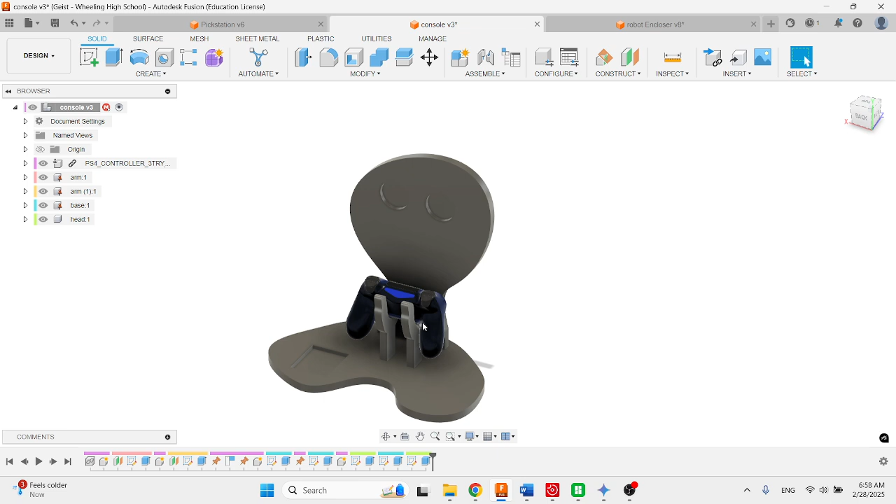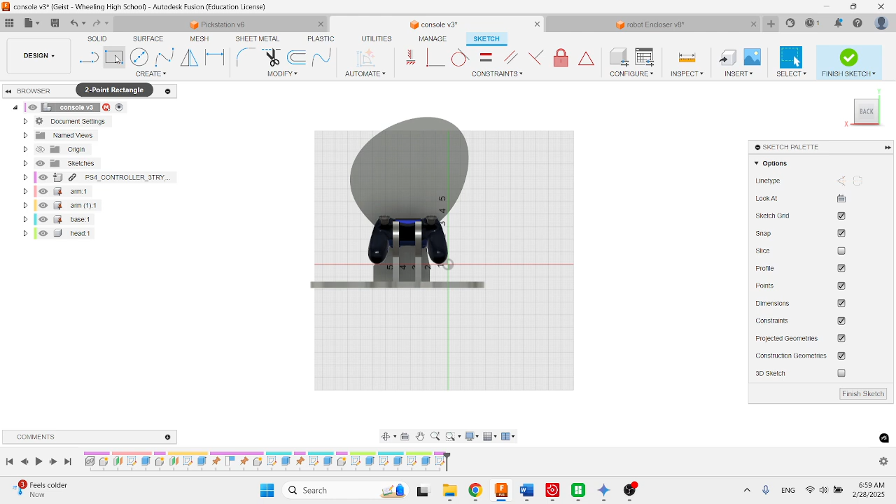Before we start laying this out for manufacture, you're going to want a sketch equal to the size of the material I'm giving you on the ShopBot. Make a sketch at the assembly level, pick any plane - I'm going to pick the front plane - and make a rectangle that is 24 wide by 32 tall. Go ahead and finish that sketch.

This is going to become the plane that we put all of our pieces onto, and it's going to automatically arrange those for us.

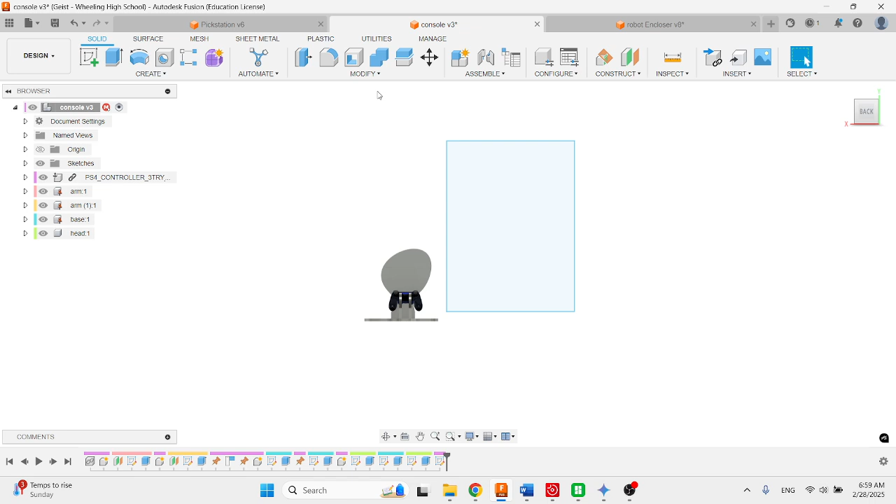Go up to Modify and click on Arrange. On the left-hand side, where it says components, only select the components that you are going to manufacture - think about it, only the stuff that the ShopBot's going to cut. So that would not include the PS4 controller for me, or anything else you might have created as objects that might be stored.

For me, I'm going to cut an arm, a second arm, the base, and the head. You'll notice they start to populate inside my components window. Once you have all of them selected - I have 4 parts that I'm going to cut.

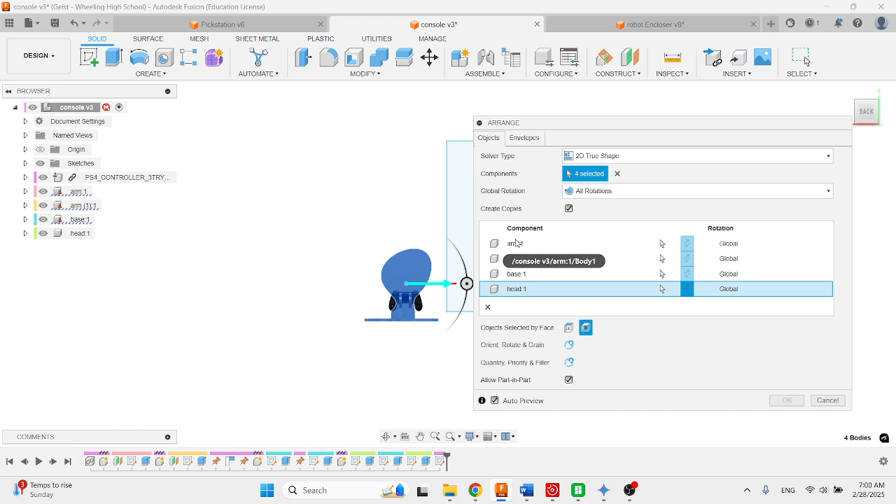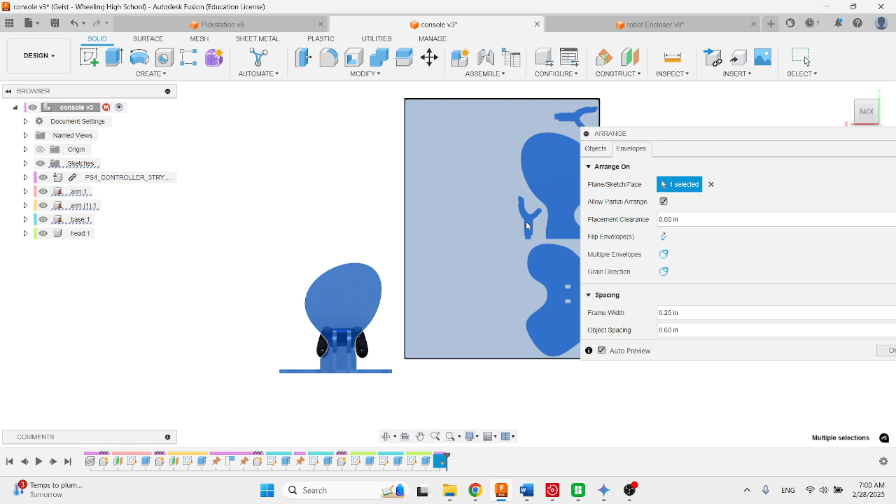Then go to the Envelopes tab, and move this window over a little bit. Click on the sketch you created that represents the 32 by 24 ShopBot sheet. Wait just a moment, and you'll see each of the pieces has been laid out onto that sheet. I'm going to tilt it a little bit.

Down here where it says spacing, it shows frame width and object spacing. Since we're using a 1/4 inch tool, think about how much space we need in between as the tool cuts. We're going to leave that at 0.6, because as it's contouring around these, we need to allow enough space for the webbing so our material doesn't come up. Leave the frame width at 1/4 inch - that's the gap between the parts and the edge of the material. The object spacing is how much space it allows between the parts.

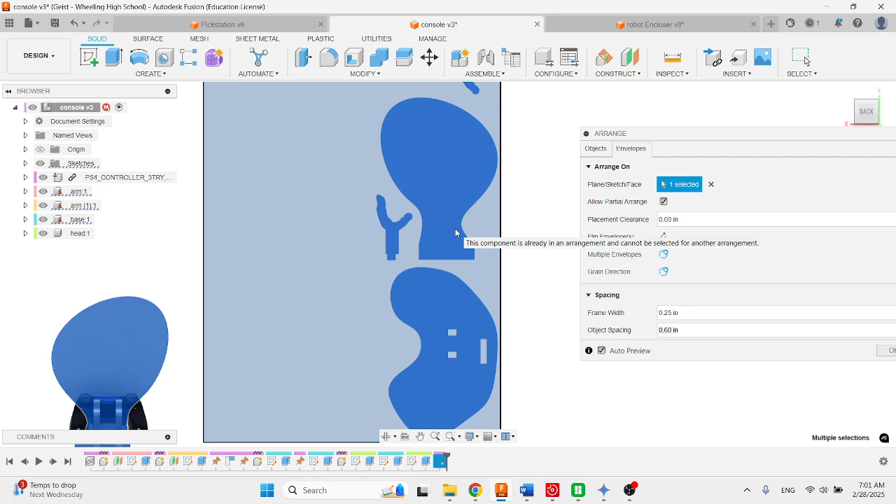If not all of your pieces show up, call me over - that might mean you designed too much stuff and it doesn't fit in the 24 by 32 space, or there might be another issue I can help you with. Okay, so I'm going to click OK. Give it a moment.

If you have any pockets, make sure the pockets are facing the same direction, which in my case they do. So I'm going to click Save just in case my program crashes.

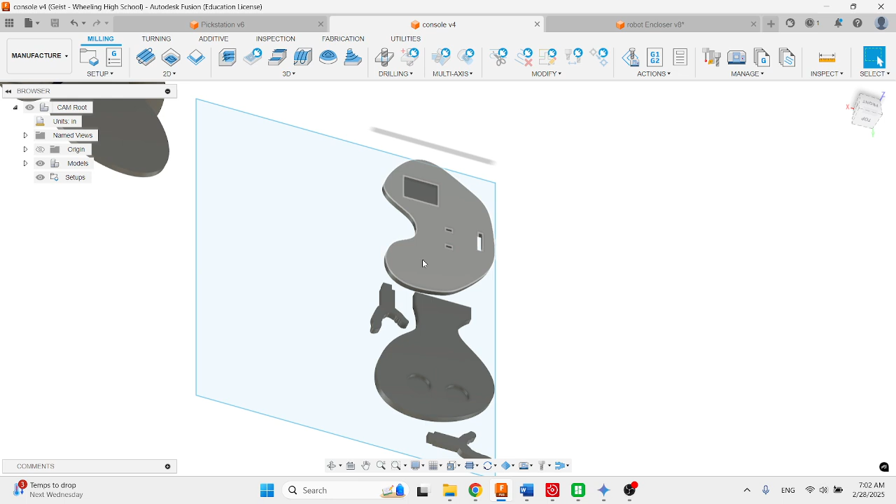That does happen. All right, so now I'm going to flip over to the manufacturing mode, just like we did for milling. Now I think it's a good time that we add our tool libraries and our machines. So we're going to go to the Manage menu.

I'm going to go to Post library first. Let's add the ShopBot. I already have it, but I'll assume you don't. So click on local, right click in the white area in this region, and click on import. Go to your downloads and click on the Shopbot file, then open it. I already have it.

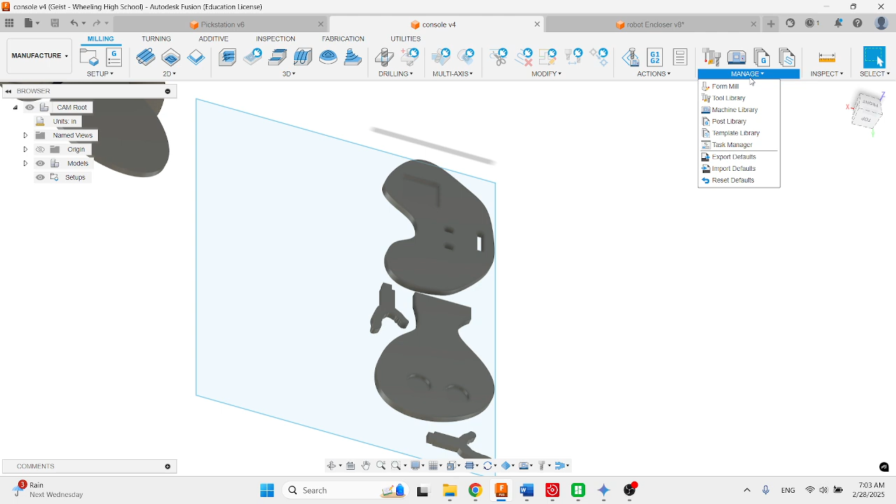When you're done with that, click close. Then go back to manage and go to the tool library. Right click on local, click on import libraries, go to your downloads, and click on the WHS Shopbot tools that you imported or downloaded from Schoology, then click open. I already have that, you'll see mine right there. Then click close.

All right, we are set and ready to go. We're going to do our setup. Go ahead and make sure you're in inches. Please, can you all change your active units to inches before we move ahead?

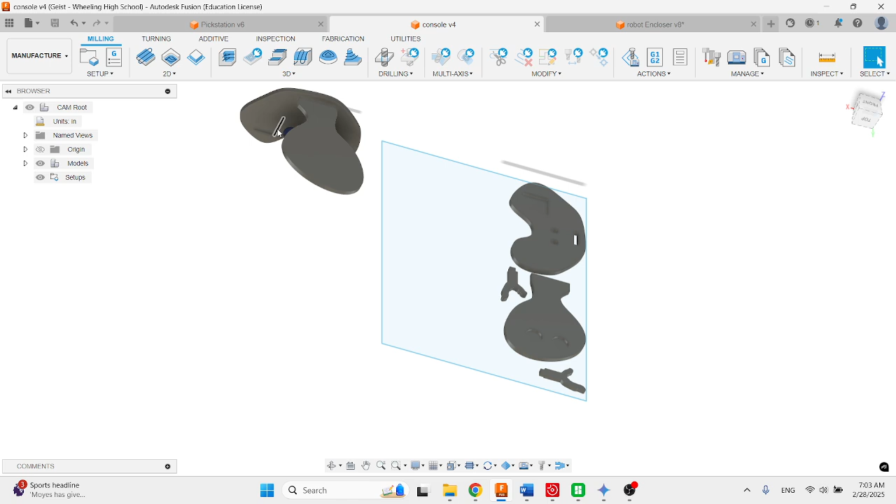All right, now we are going to click on setup. This should seem familiar to you. Notice how it's trying to set up material for everything in our world here. We don't want that. So where it says model, click select and just pick all of the objects. Make sure you pick all of them, and you'll see it start to create a solid around this.

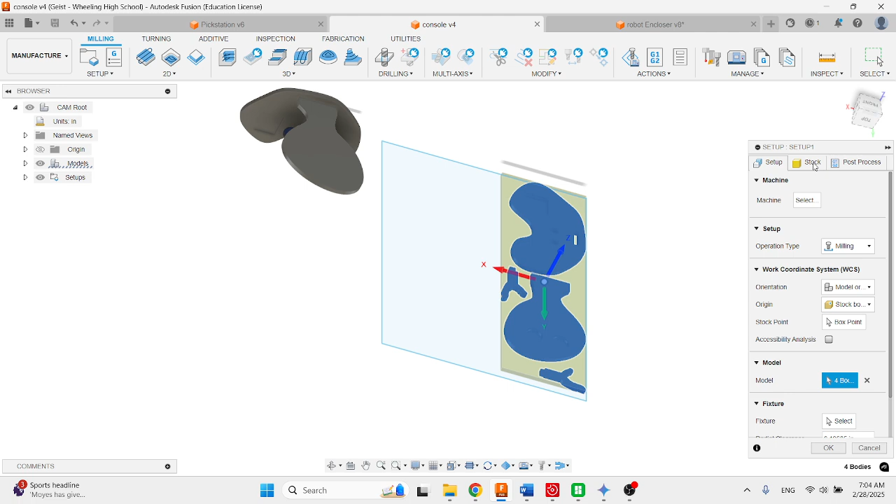So now I'm going to go to stock, and change relative to fixed box size. Change your rounding to 0, and you should see your Z pointing up. If it's not, go to setup and change your orientation to Z-axis, then click Z up.

Remember, we went over this. This was in your final exam for first semester. All right, so change your Z, make sure your Z is pointing up, but mine already is.

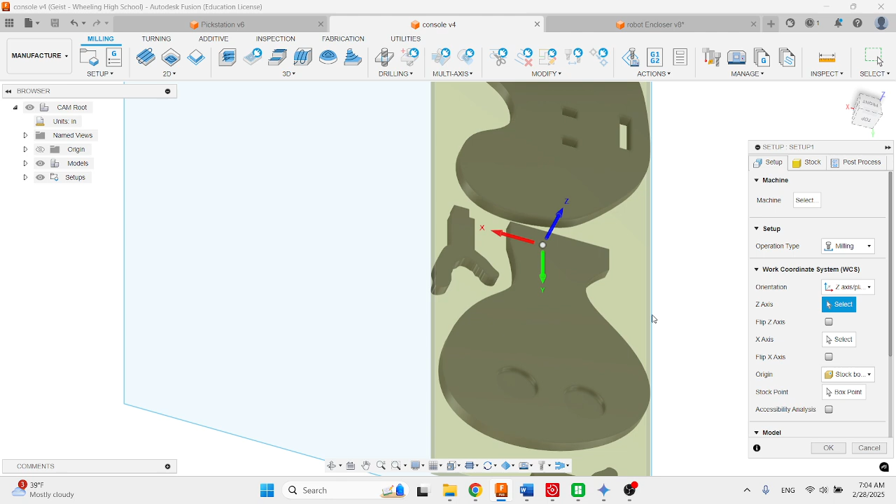Okay. However, my X has to be pointing to the right, and my Y has to be flipped. So here's what I'm going to do: I'll fix mine, and then you guys are going to replicate what I have on my screen, just like that. As you're looking at my screen, let's see, this is 24 by 38.

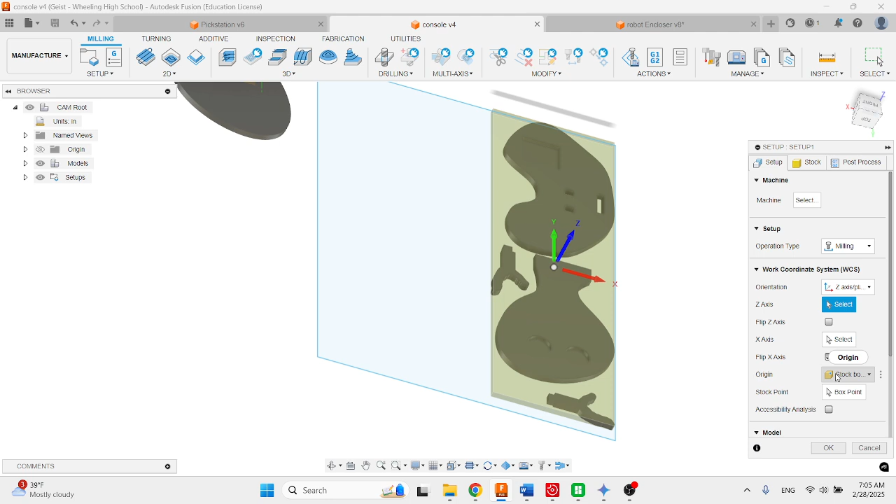Yeah, let's see, this is 24 inches wide this way. So we're going to go ahead and bring this right to this corner. So take your stock point and bring it to that corner, okay? And then click OK.

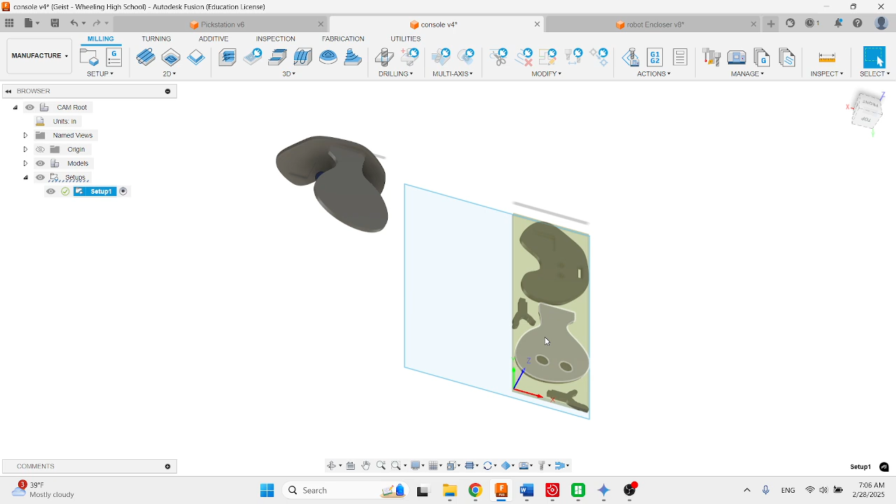So now what you're going to do, I have a template for you as well. Now that this has been set up, you're going to call me over and I am going to check your setup. This is the first video for laying out all of your stock, not your toolpaths yet - toolpaths will be in the second video. This is laying out your stock, arranging everything, and because everybody might have a slightly different size stock, call me over so I can check your Z direction and your X and Y's, then move on to the next video once I check it.